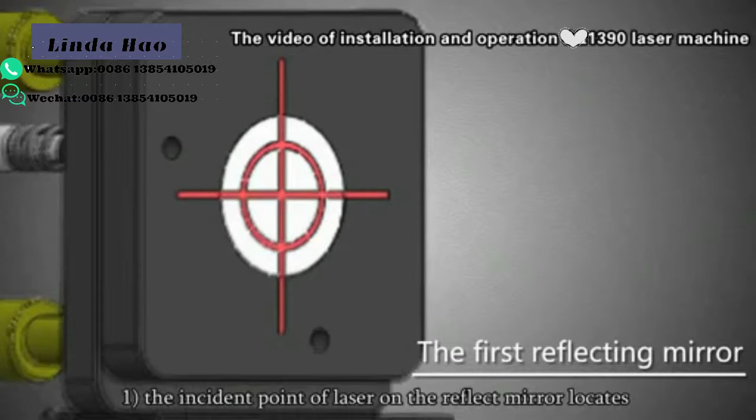1. The laser path adjustment requirements. The incident point of laser on the reflect mirror should locate within a 10mm diameter range of the lens center, approaching the lens center as close as possible.

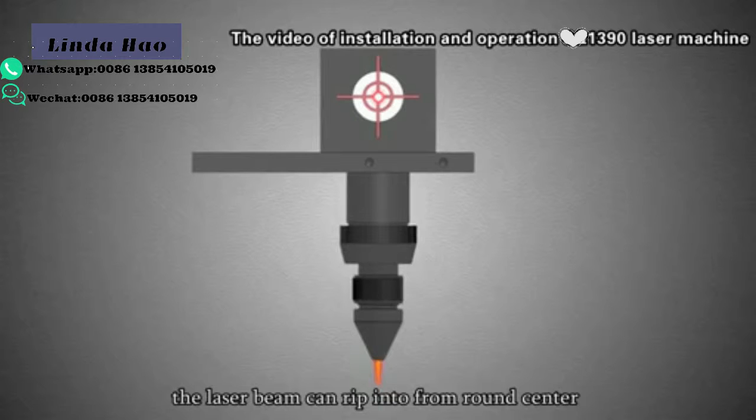2. When the laser head is at the 4 limit positions of the machine - top left corner, bottom left corner, bottom right corner, and top right corner - the laser beam should enter from the round center of the laser head and shoot from the center of the focus lens.

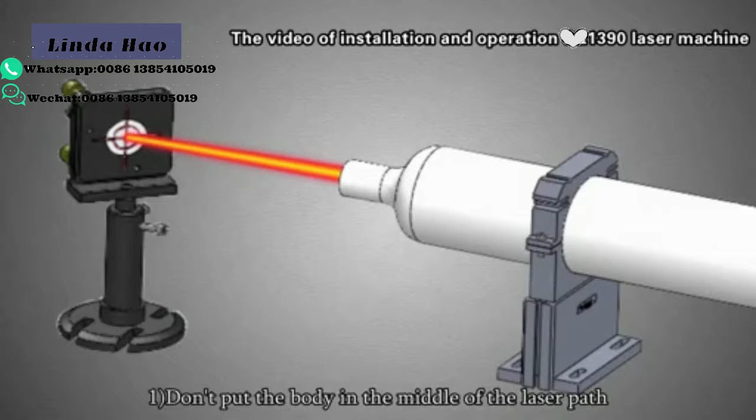2. Notice when adjusting laser path: don't put the body in the middle of the laser path to avoid laser burns.

Before adjustment, we must install the cooling water. It is forbidden to adjust the laser path when cooling water is uninstalled or cooling water circulation is poor.

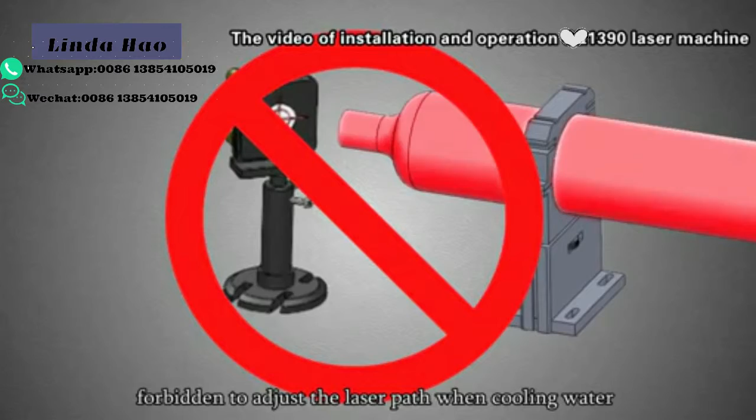3. Laser path adjustment steps.

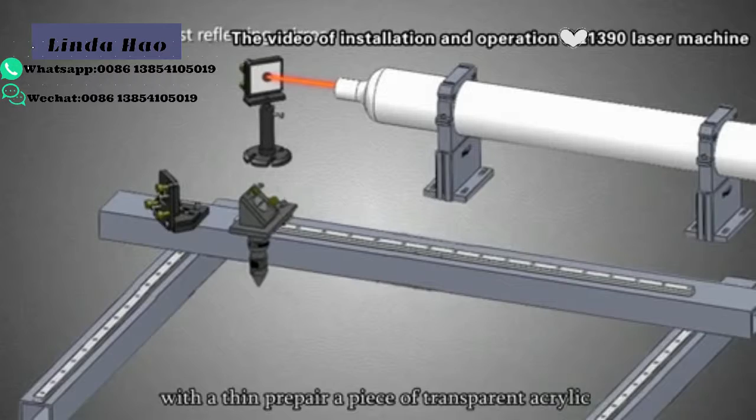1. Move the laser head to the top left corner of the machine. Prepare a piece of transparent acrylic and press laser to test whether the laser shoots on the center of the first mirror and the second mirror within the range of 10mm diameter.

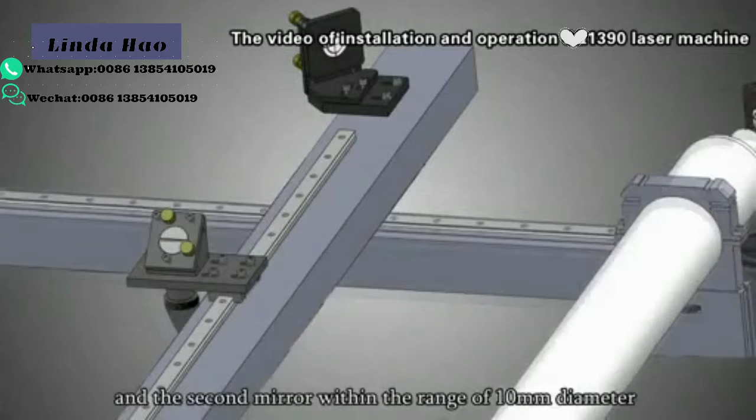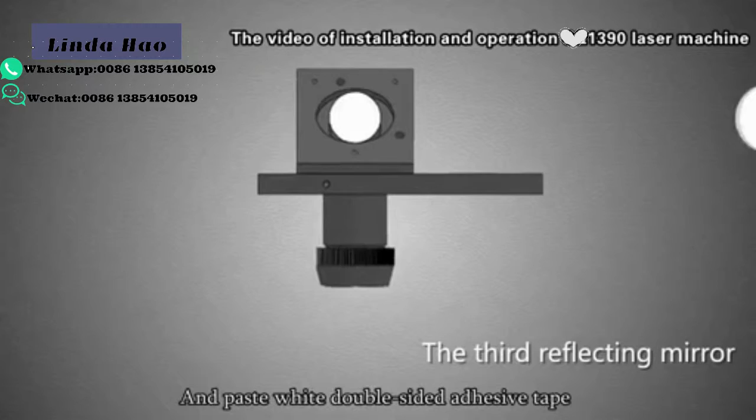2. Remove the third reflecting mirror and the focus lens cone to prevent lens contamination, and paste white double-sided adhesive tape on the third mirror position.

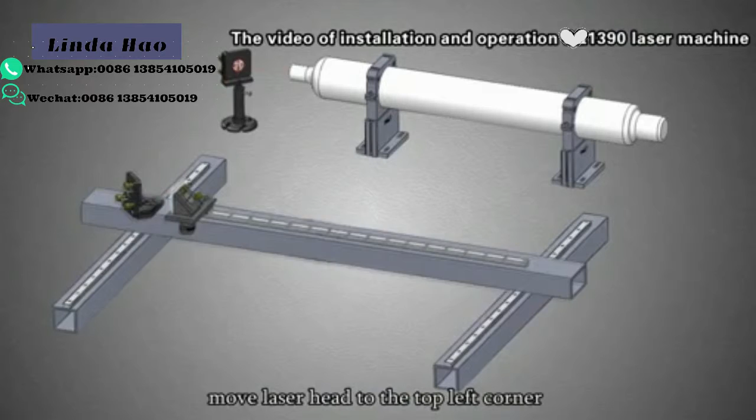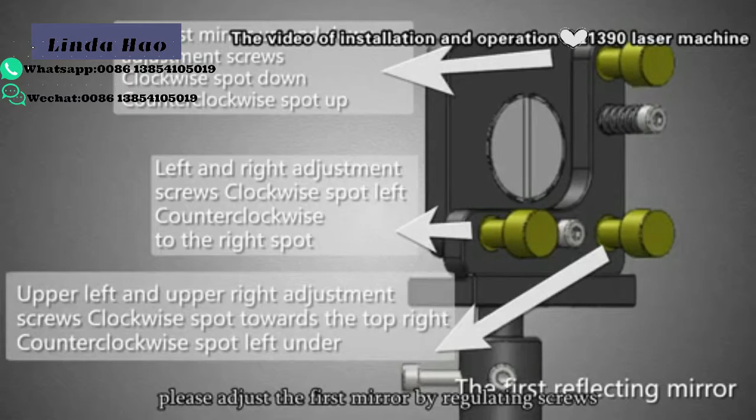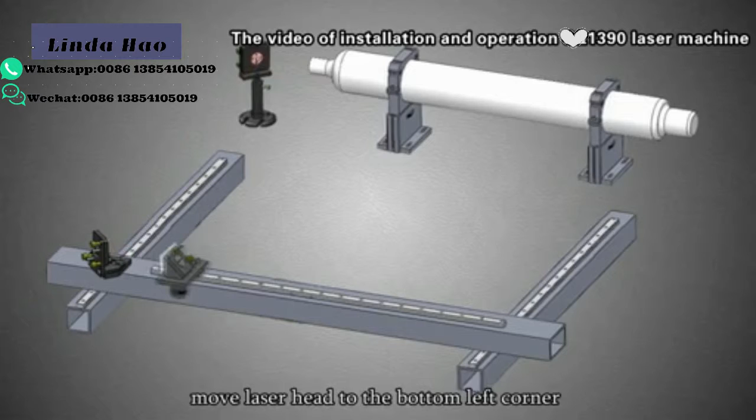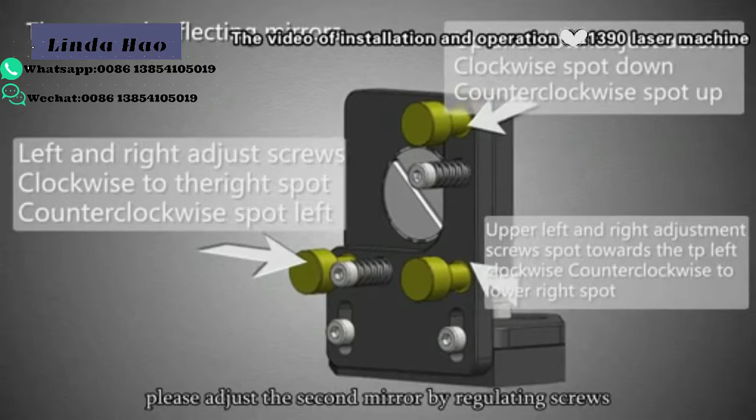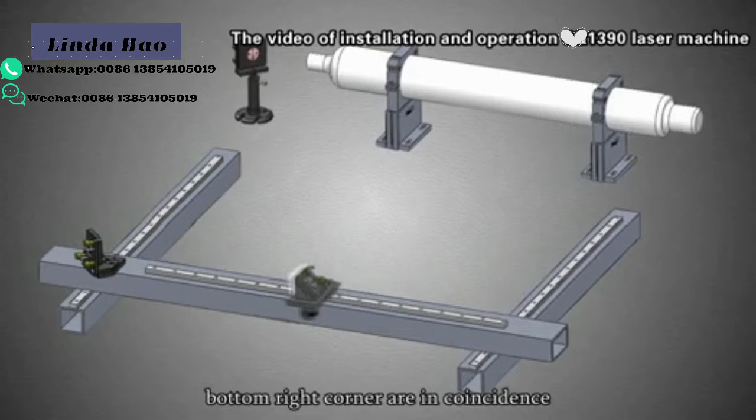5. Make sure the top left and bottom right corner points are in coincidence. Then adjust the laser head to the center.

6. Move the laser head to the top left corner of the machine and press laser. Make sure the laser spot is located in the center of the round hole within a 2mm diameter range, approaching the center as close as possible. If it is not in the center, adjust upper and lower deviation, left and right deviation.

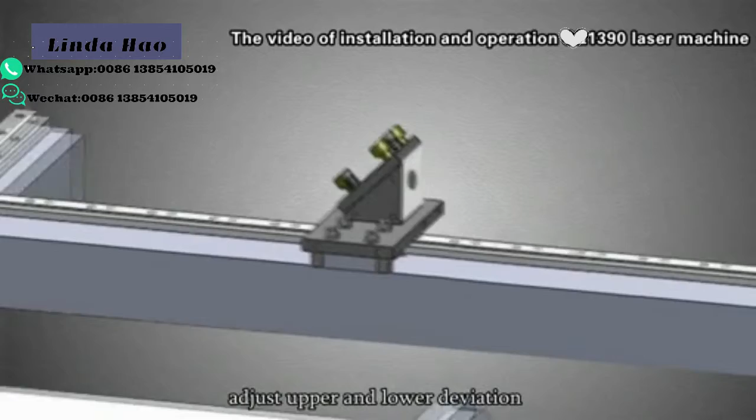7. Upper and lower deviation adjustment. If the laser spot has upper and lower deviation, please lower or raise the laser tube.

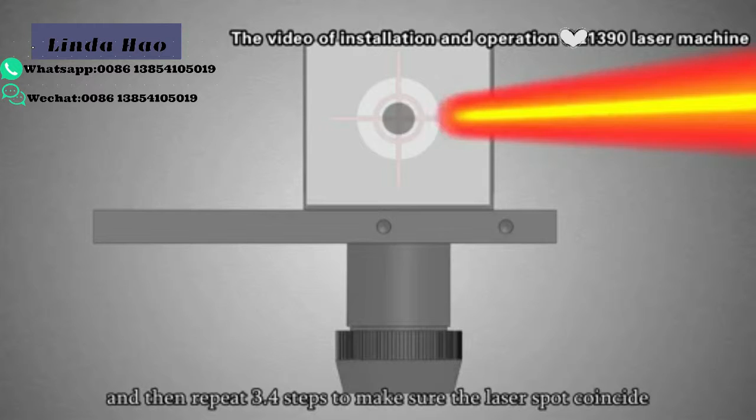Adjust the front bracket by knob. Clockwise is for upper and counterclockwise is for lower, until reaching the center, then repeat steps 3 and 4 to make sure the laser spot coincides. Then repeat steps 6 and 7 until the laser spot is in the center.

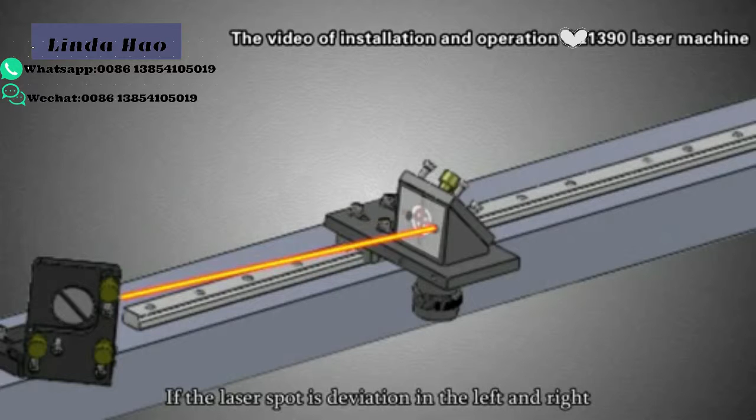8. Left and right deviation adjustment. If the laser spot deviates left or right, move the second mirror frame outwards or inwards. If the laser spot is to the center-left, move the second mirror outwards. If the laser spot is to the center-right, move the second mirror inward, then repeat step 4.

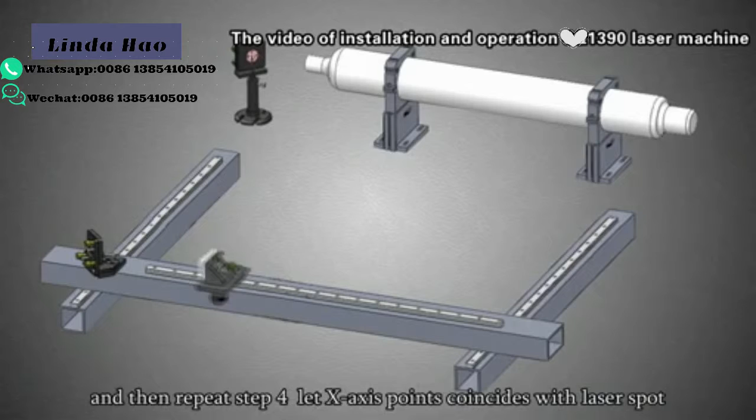Let the x-axis points coincide with the laser spot, then repeat step 8, repeating steps 4 and 8 until the laser spot is completely in the center of the hole.

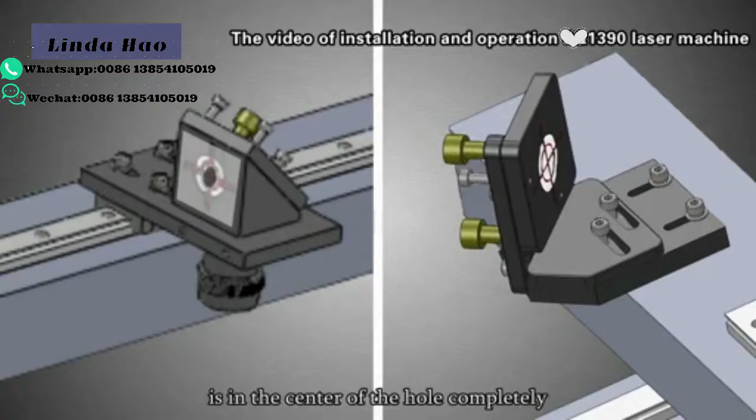9. Finally, verify the laser head at the top left corner, bottom right corner, and top right corner, checking whether the laser head is in the center and coincides.

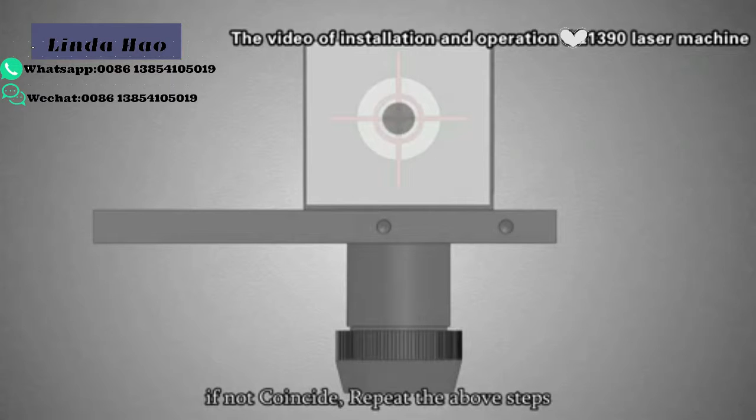If not coincident, repeat the above steps.

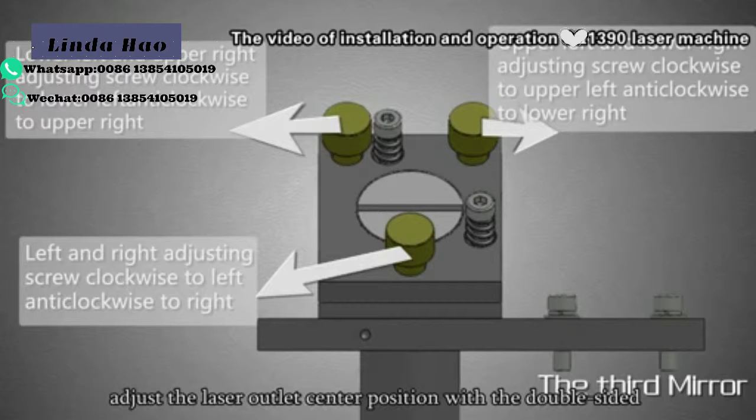10. Install the third mirror and focus lens cone. Adjust the laser outlet center position with the double-sided adhesive tape, pressing laser to get a spot.

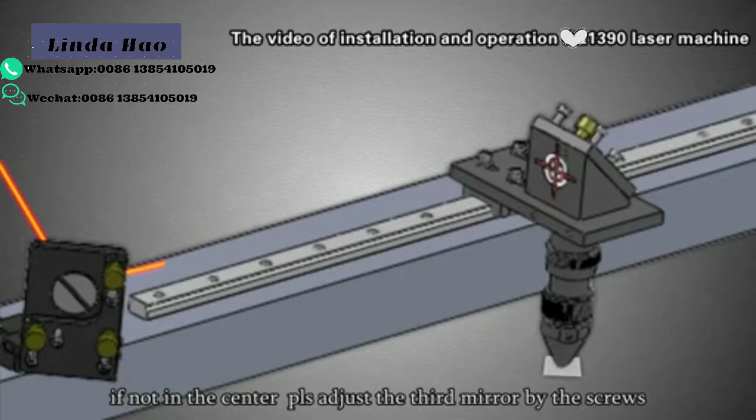Let the laser spot shoot out from the nozzle. If it is not in the center, adjust the third mirror using the screws until the spot shoots from the center of the nozzle.